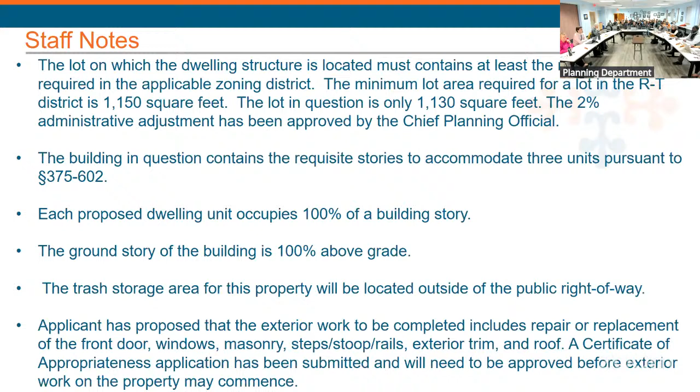All right, we've seen this before, so if there are no additional questions for the applicant, just one more call. Did Mr. Yancey or Mr. Cole, is there anybody here on the comment side? Seeing none, is there a motion from the board to approve 151J with conditions for conditional use permit?

Second. It has been moved and properly seconded. Are there any additional and final questions from the board? The motion is to approve conditional use permit for 151 J Street with the following conditions. Refuse and recycle will be stored outside of the public right of way and not visible from the sidewalk. A certificate of appropriateness application shall be approved prior to the issuance of any building permit involving exterior work on the property. That is the motion.

Call for the vote. All in favor, please say aye. Aye. Those opposed, motion carries. Thank you, board.

Oh, right, we have to do that one as a second action. My apologies.

All right. So next door, conditional use permit for 153 J Street. The adaptive reuse of the existing 2,516 square foot structure at the property to a 6,233 square foot multi-unit dwelling with 3 dwelling units.

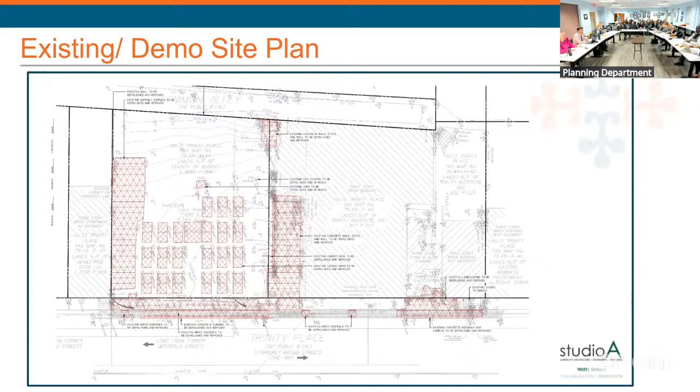And this is the basement floor plan. As you can see, the black outline is the proposed addition, and the gray walls are the existing structure.

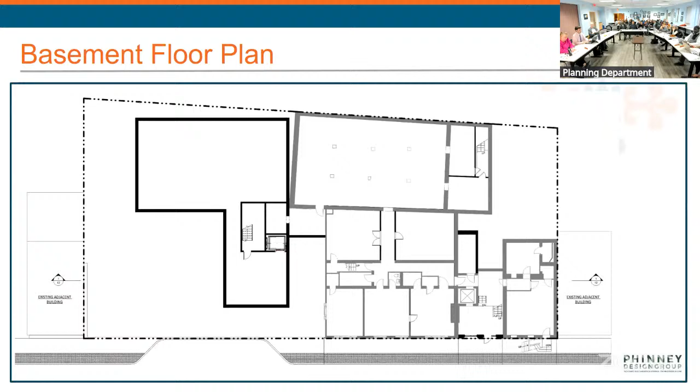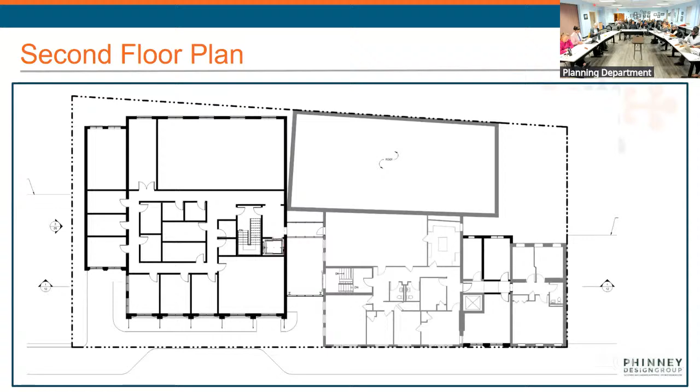And the second floor. And the third floor is only part of the townhouse and that rebuilt annex.

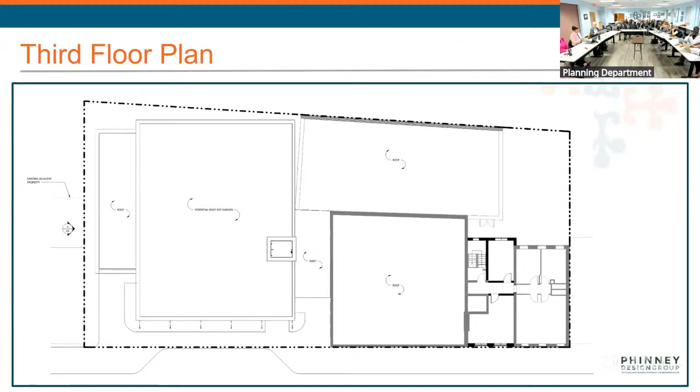Do you want to speak to some of the services? So in the Trinity Alliance, we offer a health and wellness division, a family neighborhood resource center which provides services to the community. We have a food pantry there as well, available for those in need of food insecurity, allowing them the opportunity to come in and receive food.

The hours of operation are 8:30 a.m. to 8 p.m. And we also have youth development on site, providing opportunities for after-school care for children, as well as a summer camp for the youth.

And they also have the Family Neighborhood Resource Center. Individuals can come in if they're looking for employment and have the opportunity to search for employment opportunities. We also have volunteers for tax preparation on site as well.

We have dancing with the elders on site. Those who are elderly and need a little exercise have the opportunity to come free of charge and exercise, and it's available not only for seniors but anyone who's interested in the program. So those are just a few of the programs that we have on site there.

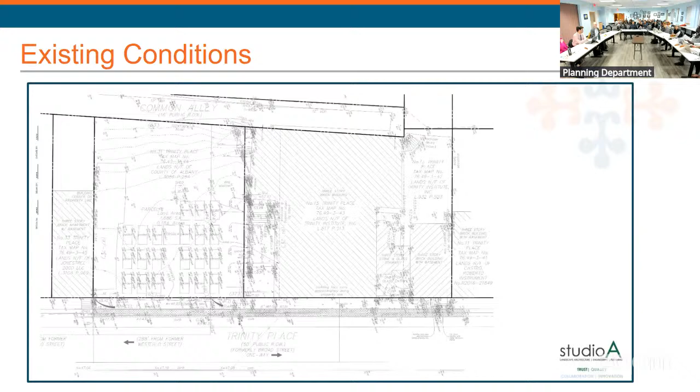So these are pretty much the same site plans and floor plans that you saw on the previous slides. It's just part of the template.

So here we have some exterior elevations, and to the left there are some materials listed for the additions. We have some natural stone water table, some dark bronze which will most likely be for the window finishes, some of the metal panels, and then we're going with a brick to blend in with the surrounding context of the neighborhood.

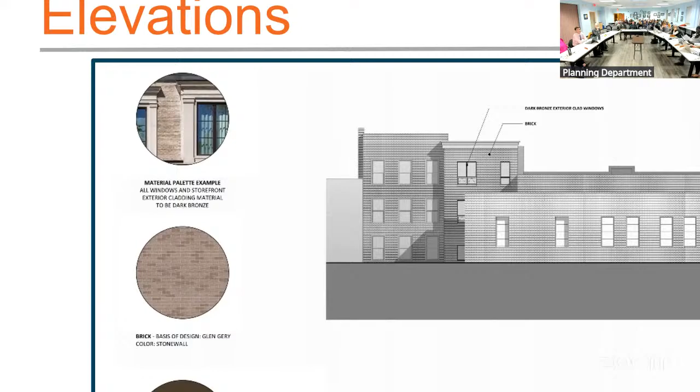This is located within a historic district. It's a contributing structure, not individually listed. So anything new or reconstructed will be of these materials. Everything else that's existing will remain, and we'll be rehabilitating and renovating it.

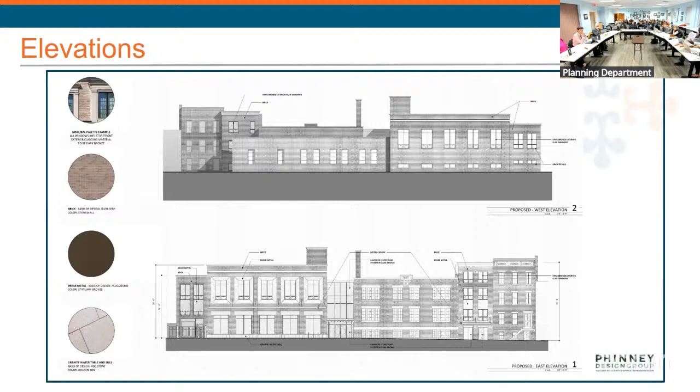And then these are just some renderings of the building on the streetscape, and that will be the overall campus for Trinity Alliance.

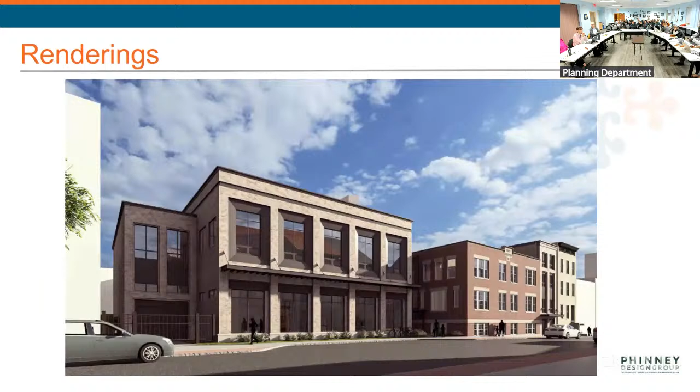So our anticipated length of construction is about a 26-month duration. This project will have to be phased. That's still in the works a little bit, but we're anticipating building the new addition first. That way, once it's complete, it provides swing space for programs to move into that building, and then we work on the rest of the existing structure. It's important that we don't completely shut down all the programs and services of Trinity Alliance during this construction.

And then as you can see, there's a full list of project funding sources up there, whether it's state or federal.

Where will you stage everything? That's a good question. We're working with Siemens to publish an RFP to get contractors on board to start those discussions, because this is a critical site. It's not easy, so that's going to be a very important plan that we put in place for staging and phasing of the construction altogether.

Do you have an additional parking lot that you guys utilize that we're tentatively planning for that staging? Can you go back, do we have a site of that? I don't know if we have the plan yet, it's just been in discussions. So that's on the corner of Trinity and Westerlo, potentially? Trinity West. Is the empty lot that they're considering for contractor parking too, or just for staging? I think mostly staging. Seems really tight.

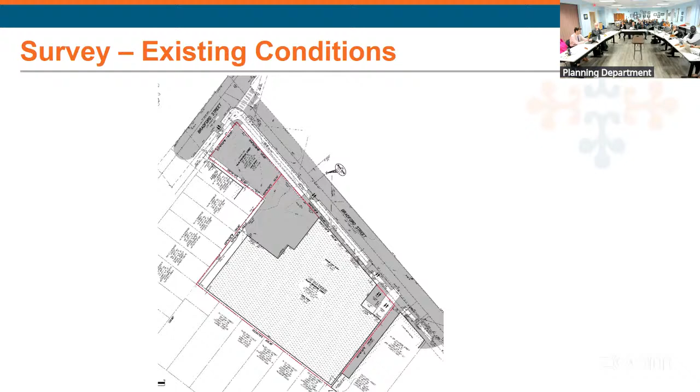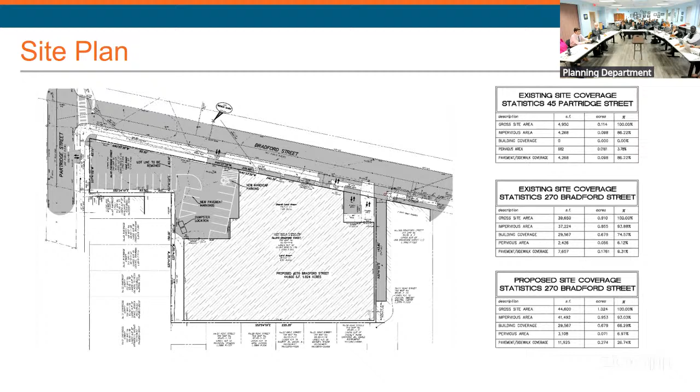Any questions from the board? No, pretty straightforward. No comments? Staff, any? Alright.

So the SEQR action is classified as unlisted, no coordinated review is required. The application was referred to the county planning board. We did receive a recommendation. They recommended the review of the New York State Office of Parks, Recreation and Historic Preservation for the potential impacts on archaeological and historic resources should be required.

The application is in front of us because the personal or business service classification of the use that's coming in is only conditionally permitted under the Neighborhood General Regulating Plan for the mixed use MUFM zoning district. The application indicates the proposed scope of work is solely interior with the exception of the parking lot improvements. The application states there's 4 tons of refuse to be generated per month. While the application states the material will be recycled to the maximum extent available, no additional details have been provided, so we're looking for a little more information about that.

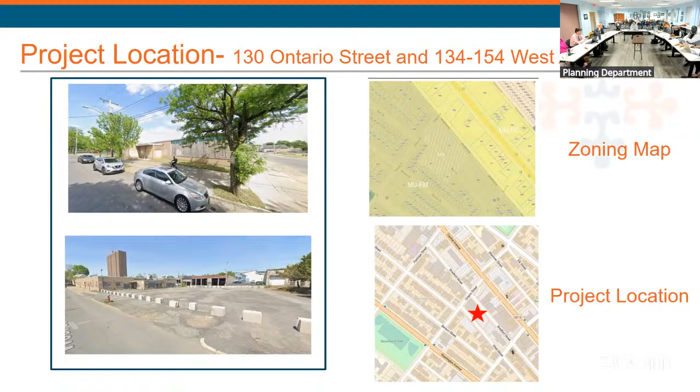If you want to move on to the next slide - so for the initial use permits, the area in green that you're looking at, that's the community hub. That's where it'll be facing Ontario Street.

Community hub space is used for residents on site, and used by the Albany Land Bank for different community activities they feel are warranted within that space. The daycare portion is shown in red, or kind of pinkish color, at the one end of the project site. That's all on the first floor.

Then we have residential units there basically on the first floor and going to the second, third, and fourth floor. Those will total 76 units. I forget the breakdown of the number of ones, twos, and three bedrooms, but they all are under the New York State Housing Program.

So all will basically be, I don't want to say rent controlled, but based on your average median income. From talking to the developer, approximately 20% will be done at 80% AMI, and the remaining 80% will be done at 60% AMI. So that's what the proposed project is.

There's not a percentage of the units that are outside of AMI. All the units on this project are similar to this developer's other project at 526 Central Ave, where all 76 units are based on AMI.

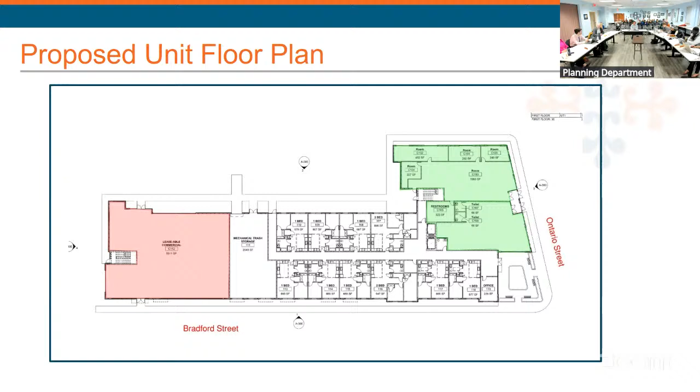Looking at the site plan, you can see the building orientation where we're trying to really front Bradford and Ontario Street with the presence of this building. And we have the parking in the rear, which is really 52 parking spaces on site.

There's a cul-de-sac that we've placed on the site, designed greater than New York State Fire Code requires. That allows access for people to come down the site, fire trucks, ambulances, emergency vehicles, or whatever, to come in and then go back out to Quail Street.

That also allows the two businesses, if you're looking at that cul-de-sac to the bottom right, those are two auto body shops, repair shops, so they'll have traffic coming in and out. We want that traffic circulation, plow trucks, garbage trucks, to keep going in and out.

You can still access your way through the site for fire safety purposes, as shown for the parking lot from Ontario Street to the west, or to the cul-de-sac through the parking lot. But by the configuration of it, it just basically deters traffic from bisecting the site.

Obviously you can see the Bradford apartment complex much easier to the right now, and their parking lot. We've now designed the parking lot so that we're pulling it away from the houses on the bottom of the page. On Ontario Street, the existing parking lot right now butts right up to their homes with no screening or protection.

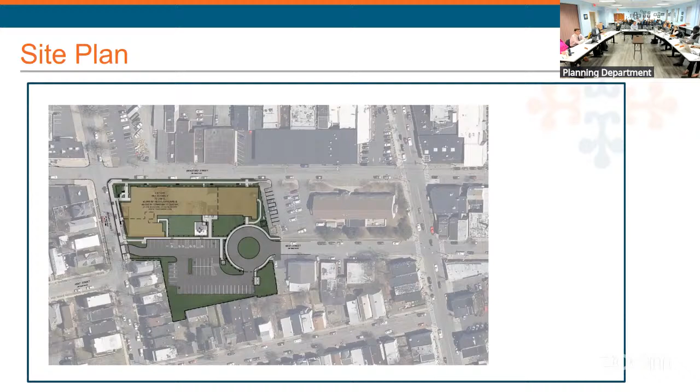For the conditional use permits, here's some of the general hours of operation. Daycare will run from 7 to 6, community hub from 8 to 10. You're looking at 8 to 10 employees, 5 to 6 employees at the community hub space, but I envision those being back and forth.

There are some other similar uses nearby, all within a half mile basically of this site, existing daycare facilities ranging in size from being at home to really being in a retail space.

Really the biggest aspect of the conditional use permit for a daycare is going to be the kids outside during daytime hours. So when we go back to the site plan, I'll show you where we have the outside amenities for the kids, keeping them away from the single family homes.

And we don't expect any large deliveries. On the demolition side, pretty straightforward: existing one-story building built in 1962 is going to be taken down.

A lot of the bricks, and certainly any recyclable metals within the building, will be pulled out and taken care of. The asphalt on the parking lots and concrete will basically be ground up and recycled for sub-base material within our project. Some of the stuff will certainly have to be shipped off-site—not everything, based on the history of this building, can stay on site.

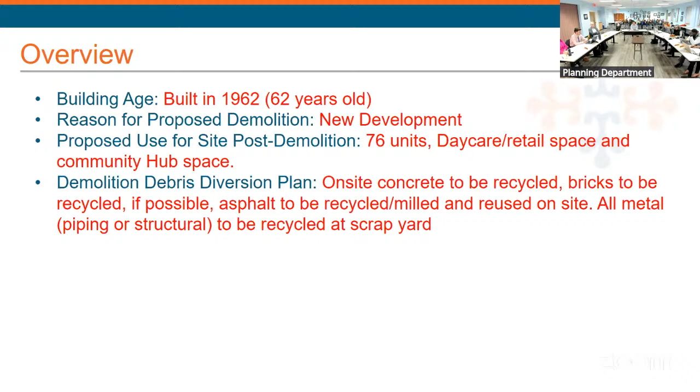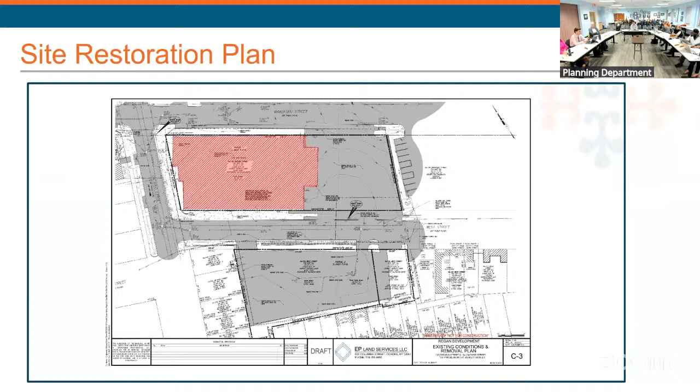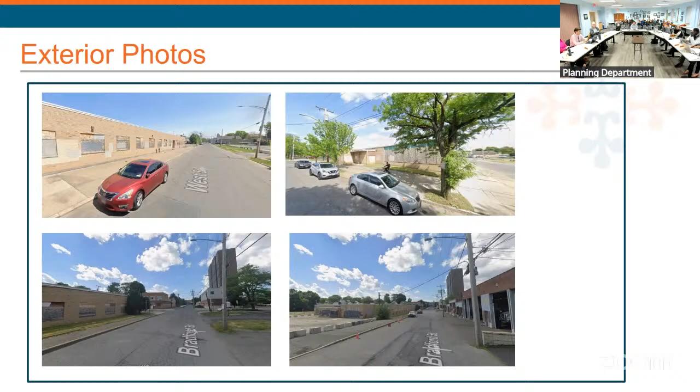Here's some existing photos of what the building looks like. Like I said, there's boards on the window. Nothing really fancy, nothing exciting. Under site plan review, again, we just have the center building in the mass with lots of asphalt around there.

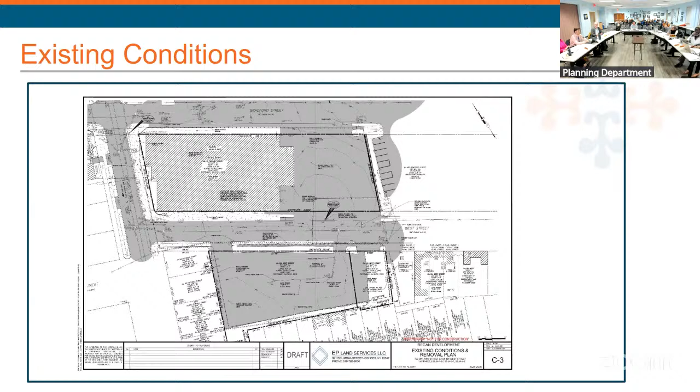And then there's additional space, I'll say on the south side, that can also be used as recreational space. We're certainly above the code requirement for the number of units for recreational space between inside and outside, and we feel that this plan definitely has multiple aspects of things.

The dumpster placement is always a concern for most planning boards. I've pushed it as far away from the residential homes as possible and placed it closest to the commercial and mechanical shops. Odors will be reduced by placing it in that general location, far away from the single family residential homes. Typically, that's what everybody wants to know about—where's that dumpster? You want to go to the next slide?

Here's some elevations and rendering views of what the 4-story building will look like. From the corner of Ontario, you can see that we are now really masking that corner.

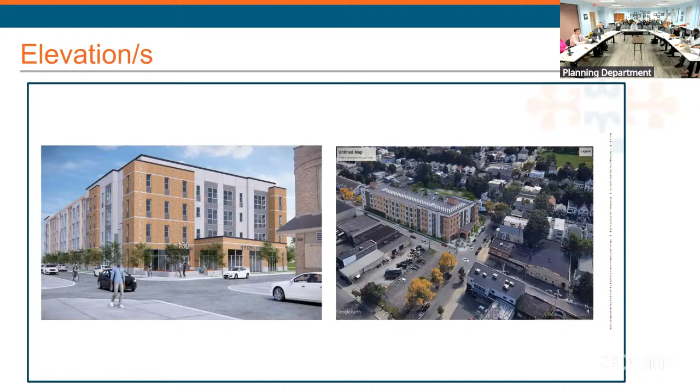The building's not placed exactly on the corner because we're stepping back the 4-story portion of the building, but we are providing an entryway in a formal location for them to go into. The building height will be 56 feet tall. There's all the sides, elevations.

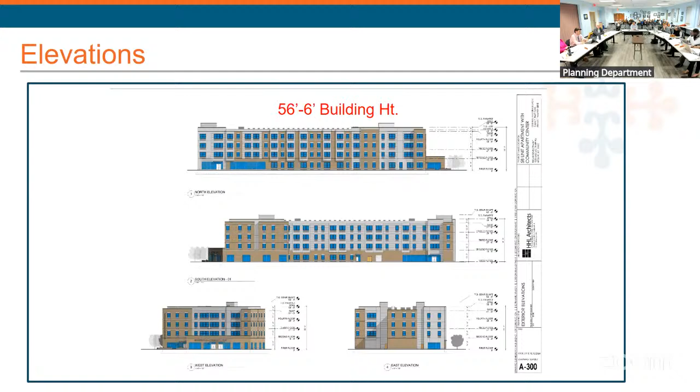Those are the first floor plan, again, the commercial spaces and the tenant spaces. And then the second, third, fourth floor plans are all the same. So I hope I did that in less than 10 minutes.

I'm probably guessing you have some questions on this, but we'll just leave that information up.

Understood. Any questions from the board at this point?

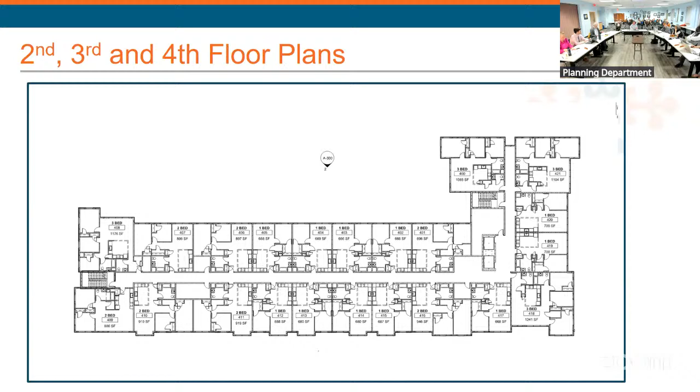Did the plans have washer dryer units in them? I have to ask the architect if there's a common room or if they're in each individual unit. I forget at 526 Central Ave whether there's a common one or in each individual room, or in each space. I can't tell you—from looking at that plan, I don't see a space for them, to be honest. So I believe it's a common area, but I can certainly ask that question for the architect.

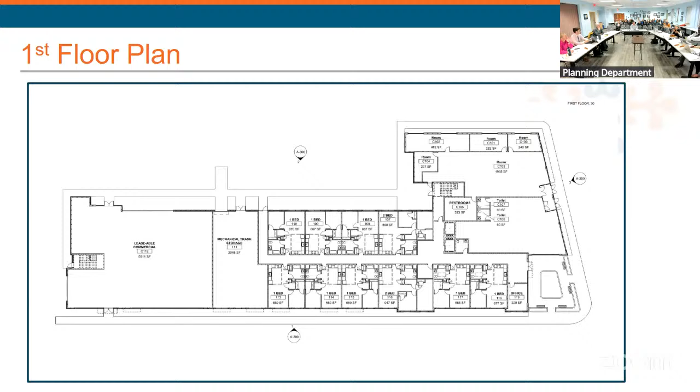So when you look at this street, there's only one entry in the commercial space for the daycare, but when you take it to the street, is there like a crosswalk there, or is there? So the daycare entry actually has 2 points. One is—can you zoom in?

It's directly across from the mechanical shop on Bradford. So there's one main entry there, but there's actually a rear entrance that faces also on the cul-de-sac. So it actually has a dual entry point—one on Bradford, one on the cul-de-sac.

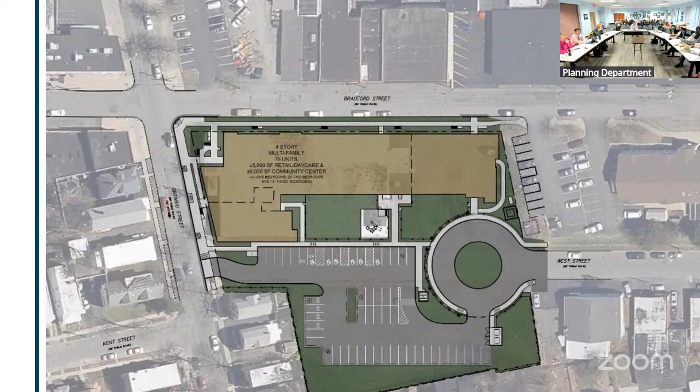Okay, I envision if I'm dropping off my kid, I'm going to just go to the cul-de-sac. But that's assuming you drive. If you're walking, obviously you have multiple points of entry. If you're coming from the south, you can walk in and enter that way. If you're coming from along Bradford Street or Ontario, you can come down and cut through because the sidewalks are all connected throughout the project.

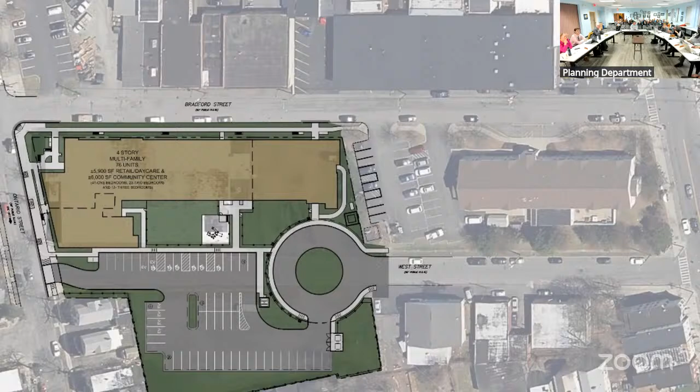You want to be able to cross, but if you cross Bradford, there's a lot of cars to navigate. Wouldn't it be great if there was a crosswalk in line with the cul-de-sac, all the way up? Just in terms of crossing, it would be great to put some street amenities, aside from making it driving centric.

That area we can look at too. For example, the streetscape - if you look at the existing conditions, the sidewalk is placed right next to the curb line. So I pulled that off so we could put in street trees and soften that building up.

But across the street, I think where you'd be walking into is the backside of a mechanical shop - that's actually one of the comments, that's where it's going to end up. To me, that's probably not the best solution, having a crosswalk lead literally to a mechanic shop where trucks and cars are coming in and out of that location.

Right, and also, many people might be driving, but it's a pretty vibrant community with kids. A lot of people are going to walk.

So it's certainly a consideration I can look at, but typically we want to avoid a mid-block crossing if possible, and based on the use next door, it's probably not the best situation. It might not be safe. It just seems that because you've strategized your entries on the ends, if someone wants to cross, sometimes they don't go all the way to the end. So we just want to provide some boundaries.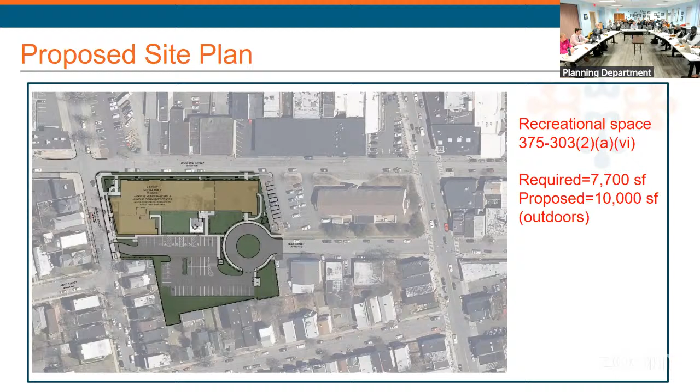That's certainly one thing that will be a bit different from our public meeting in June - talking to residents around 526 Central, they actually wanted, because the trees aren't fully mature and it'll take a while, a shade aspect. So you'll see in this project, near the cul-de-sac on the back side, there's a 10 by 10 gazebo with a picnic table underneath it so people can use it outside and get out of the sun, staying in the shade.

So they're not in the heat. That was one comment from a prior project that I incorporated into this one. Many of them spoke about the site - they loved it, X, Y, and Z, but one thing they wished they had was a little bit more coverage.

And the exit points in the building provide a canopy for code and everything as well. That's correct, yes.

But you can see from the landscaping plan, all the single-family residential homes to the south and west - the bottom of the page and to your left - we have new 6-foot-high aluminum fencing going up, and we're going to screen that fencing with a hedgerow, so the parking and everything else is completely blocked from them. Currently there's a dilapidated chain link fence there, and you can kind of see the parking lot.

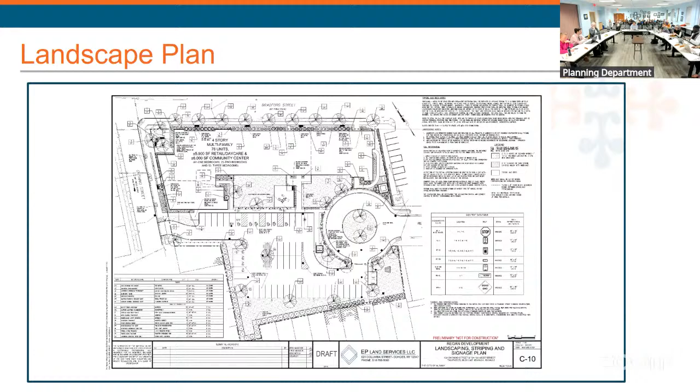Cool, no problem. All right.

Yes, I did see the written comments from the Walk-in Spring Company. That was the piece on their ability to maneuver the vehicles - they said they work on a lot of vehicles. So board members, check that out by the time we get to the next meeting.

So just remember, parking demand for this project is, I think, around 28 as calculated. We're providing 52 on site.

So even though there's street parking, if the board decides to add a no parking lane in front of those places, there's plenty of parking on site. Typical of 526 Central Ave, we had a parking ratio of 1-to-1 for the units, and certainly if you go there, the 1-to-1 requirement is not being met. It's certainly underutilized, that parking lot. So just giving that forward as a reference point.

We wanted to provide some parking on site for employees, tenants, and things like that. We felt that between that and the 23 parallel parking stalls along the existing curb lines, what you could do was plenty—it'd put you in the 80 range. But losing a couple isn't going to be that big of a detriment for the project. Absolutely.

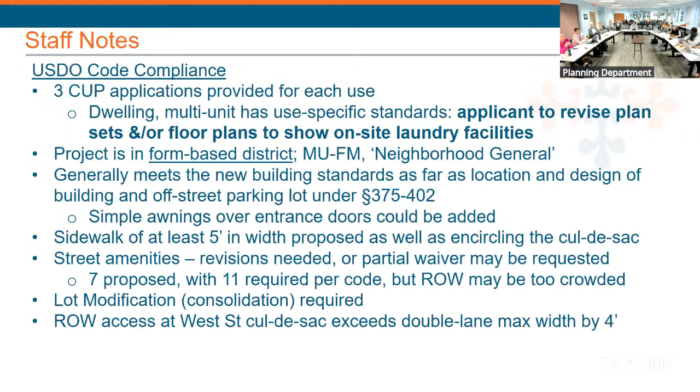So we're in a good standpoint from street trees and buffer landscape. An exterior lighting plan was provided. For any additional signage, building sign permits will need to be provided. There's certainly a possibility.

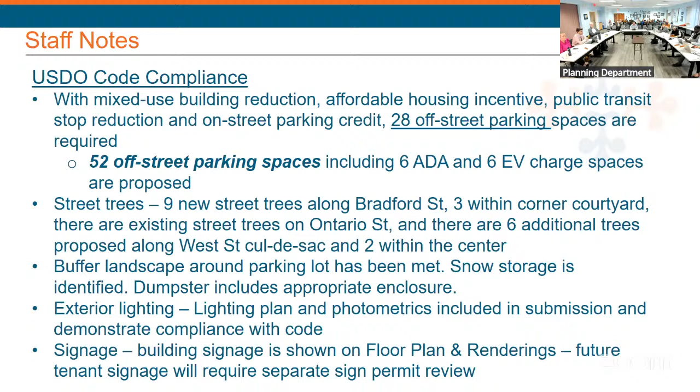That there will be changes to the current cul-de-sac design, maybe some slight tweaks here or there, depending on the departmental comments we get back from traffic engineering or DGS. It was partially designed in conversation with someone from city engineering. So hopefully not too many design tweaks, but because it is essentially dead-ending an existing city right-of-way, there will obviously need to be formal processes involved with the common council, so that is also separately ongoing.

So the recommended action is to declare the planning board to act as lead agency under SEQR and initiate coordinated review just with the New York State HCR for the funding source. All right.

Any additional questions from the board? Hearing none, is there a motion to declare the planning board to act as lead agency under SEQR for coordinated review? So moved. Is there a second? Second. It has been moved and seconded to declare the planning board to act as lead agency under SEQR for coordinated review. All in favor, please say aye. Aye. Those opposed? Motion carried. Thank you.

That concludes our public hearing agenda, so I thank you all.

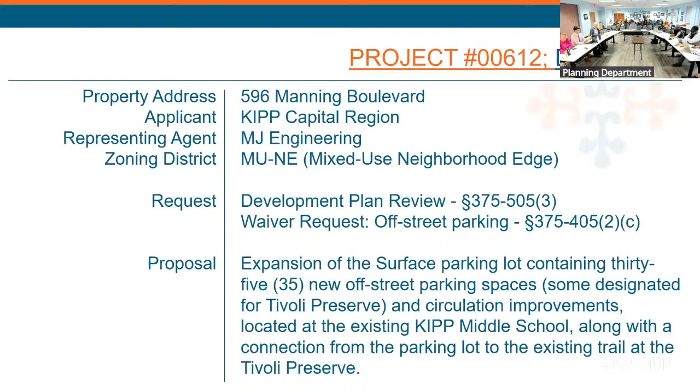Good evening. As the Chairman mentioned, it's 596 Manning Boulevard, KIPP Capital Region, currently zoned MUNE mixed-use neighborhood edge. The requirements for this project will be the development plan review and also a waiver request for off-street parking. It's the expansion of a surface parking lot to accommodate not only additional parking for KIPP School but also provide spaces for the new improvements for the Tivoli Preserve project for the city.

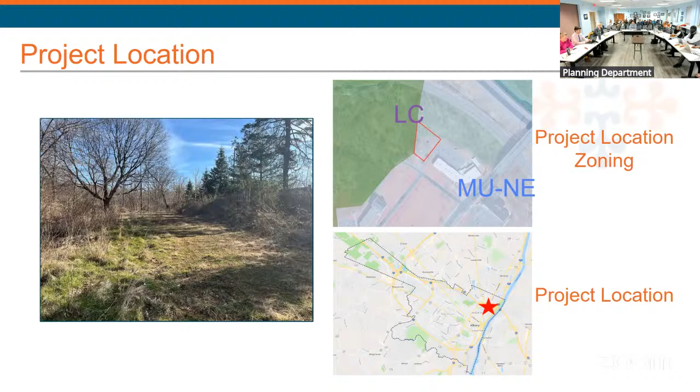Here's the project location. On the left-hand side is an image from North Manning looking into the property where there used to be a single-family residence. Looking to the right, you can see the MUNE zone and the existing middle school, an L-shaped building with the existing parking lot in the rear, and this will be to the west of the current lot.

Existing conditions, north is to the left of the page. You can see North Manning running up and down, the road going into the Livingston apartments on the right-hand side, and the driveway that currently goes to the rear of the school where buses drop off kids at the rear door. This parcel is shown in red, about 0.72 acres.

Back in 2021, the city of Albany entered into an MOU with KIPP School for this piece of property. It's owned by New York State, and KIPP is working with New York State for that transfer. As part of that transfer agreement, the additional parking for the KIPP school is also to incorporate Tivoli Preserve parking to connect to Tivoli Preserve that's there. The city is also working on an ongoing Tivoli Preserve improvement project, which we have met several times to incorporate our project into theirs.

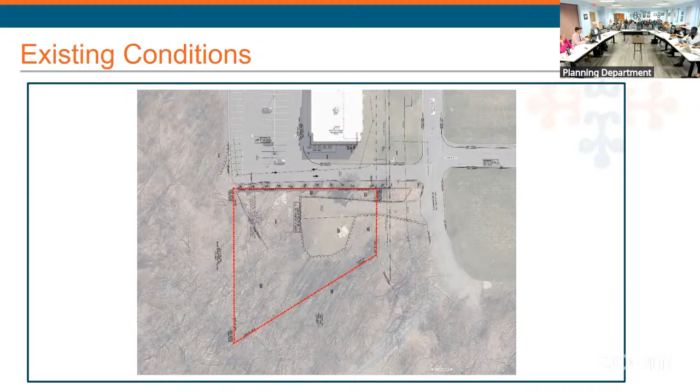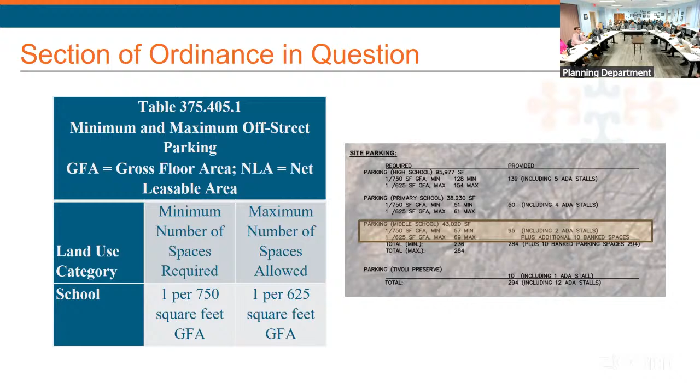We'll go through each of the 5 criteria for the waiver review. Character of the neighborhood: the request does not change the character of the neighborhood as it is located adjacent to an existing parking lot. Adding the additional driveway and parking spaces will improve the layout and help streamline traffic, reduce delays, and enhance safety for students, parents, and staff on the school premises. This will also give flexibility for when they hold larger events at the school, making it more convenient for parents to park and keep parking on KIPP property without spilling onto city streets.

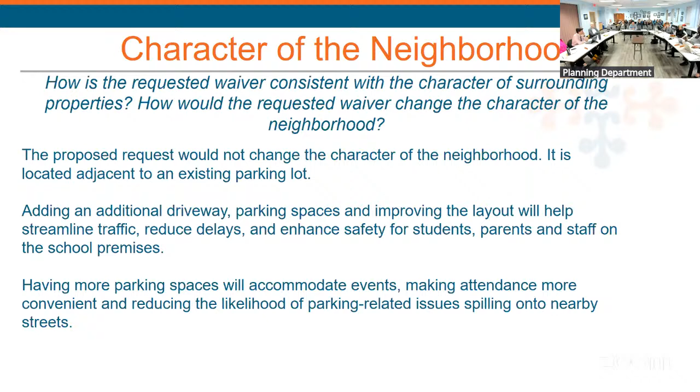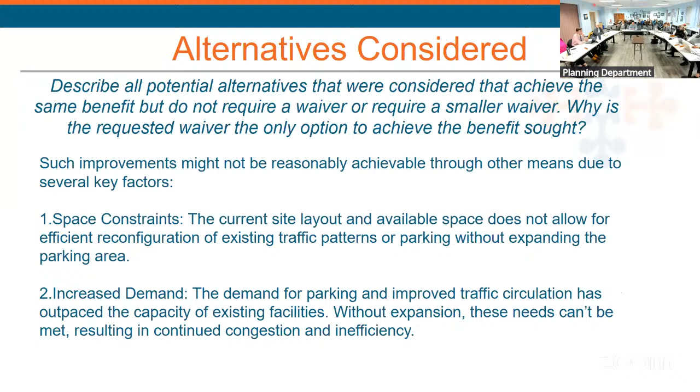Alternatives considered: space constraints. The current site layout and available space does not allow for efficient reconfiguration of existing traffic patterns for both bus and parent drop-off. The demand for parking and improved circulation has outpaced the capacity of these facilities. Without the expansion, these needs cannot be met, resulting in continued congestion and inefficiency at the middle school. Another consideration is safety concerns — optimizing the layout without expanding does not sufficiently address the safety risks posed by current traffic flow and parking limitations. Event needs, school events, and community access, like visiting Tivoli Preserve, require a more substantial parking solution than what's currently available.

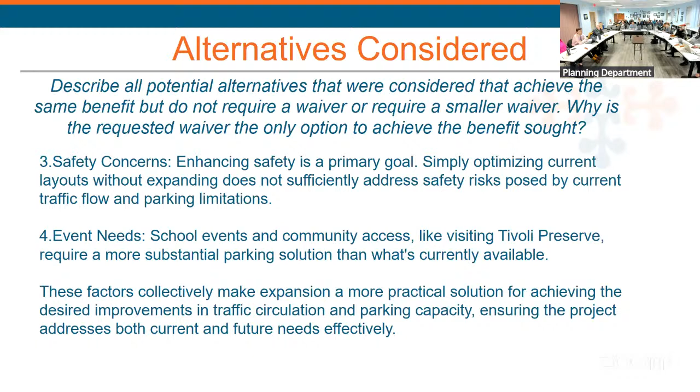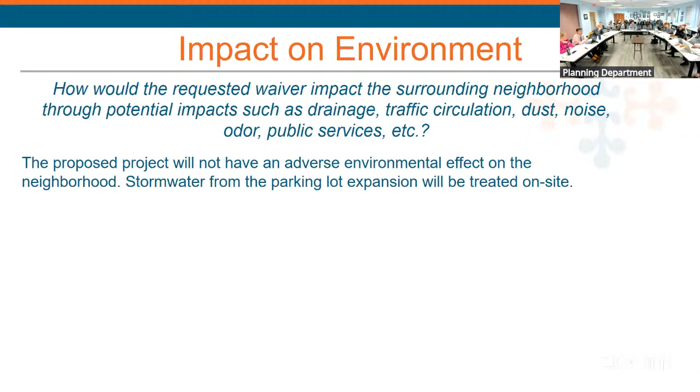Sustainability: the new expansion is set to create a better experience for KIPP with a more direct drop-off and pickup route, less street congestion, and plenty of parking for school events, while providing access to the Tivoli Preserve. Impact on the environment: the proposed parking will not have an adverse impact on the neighborhood. One thing I did mention is stormwater — we will be having post-construction stormwater management on site to handle the stormwater due to the parking lot expansion.

Self-created: improving the school traffic circulation, expanding the parking lot.

How many more slides do you have? This is the last one, I believe.

Just to quickly summarize, KIPP often, if you've been out there, has congestion issues along North Manning. So this is going to help with getting traffic off of North Manning and better circulation in and out of the facility. Same thing with event parking, also to keep that off of city streets.

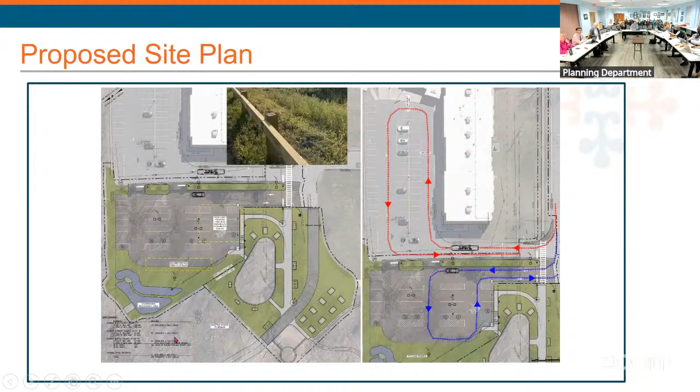So as Walt mentioned, the property previously had a single-story residential building on it, but is now predominantly overgrown with vegetation. The property is still currently owned by the state of New York, with a condition of sale from New York to KIPP, which you can read in the staff memo or which is typed up there. I won't bore you through that.

There's specific language for the use of the property included in the sale. And then there's a separate MOU between KIPP and the city of Albany, which was referenced by Walt, which is part of that engagement between the city and KIPP for those improvements to the Tivoli Preserve and part of that banked parking or specific parking for the Tivoli Preserve.

The project was referred for departmental comment a couple weeks ago and will be referred for Albany County Planning Board for the February meeting. Again, it's owned by the state of New York, so it's required by 239-m referral. The project is classified as an unlisted action based on the project scope, but it's not required to have coordinated review.

As far as code compliance, it requires a lot consolidation, as the surface parking lot is not a permitted use as a primary use in the MU-NE, but is permitted as an accessory use to the existing primary KIPP middle school. So we're expecting a lot modification to be submitted to combine 321 Northern with the existing 596 Manning.

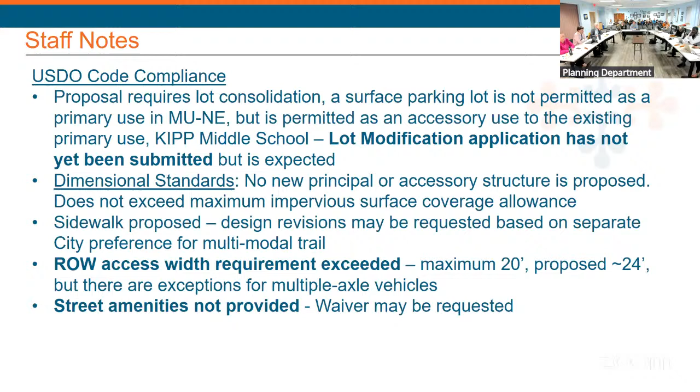Street amenities are currently not provided. That includes the free benches or bike racks, those kinds of things. So either the site plan could be amended or additional waiver could be requested. As Walt went through, off-street parking exceeds the maximum permitted, so a waiver was submitted for that, and would be part of the ultimate SPR approval.

As part of the staff memo, we did request consideration for potentially use of pervious or semi-pervious surface where possible, due to the location adjacent to the Tivoli Preserve and Patroon Creek, and reference that specific code section in the USDO. Off-street parking spaces don't meet the dimensional standards by like 1.5 feet or 2 feet.

That's again a very minor adjustment, which can be requested as a minor waiver, not nearly as significant. I feel like waiver is one term, but there's kind of almost different levels. It's more of almost an administrative adjustment. And then we're requesting a landscape sheet just to see some additional details of the in-lot plantings that are proposed. So currently there's no action proposed.

It would just be to table or defer.

Can I just ask one more question about the buses? My kids go to public school in the city of Albany and they use Tripper CDTA buses. Is it the yellow school buses that come in or is it CDTA? It's the yellow buses, but they come in from districts all over. Yeah, so that's why it's not a city system. Got it.

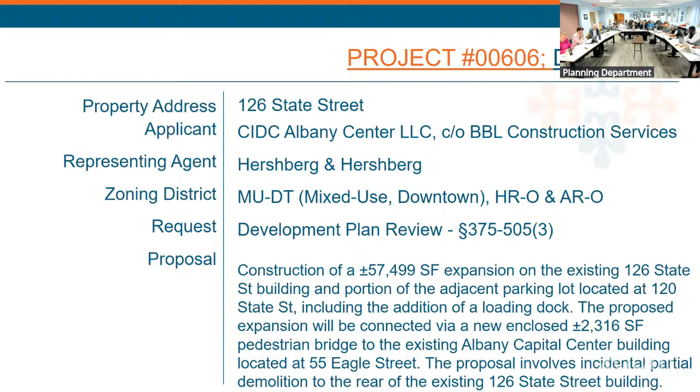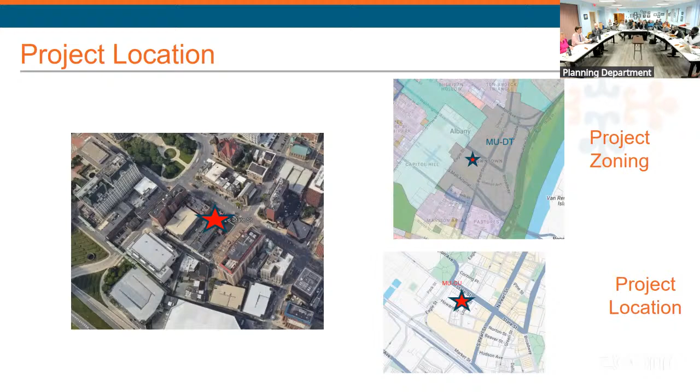The site location is fairly apparent to everybody. It's right at the corner of Lodge and Howard and goes up Lodge Street, and includes the rear of 126 State Street. We're all in the MU downtown zone.

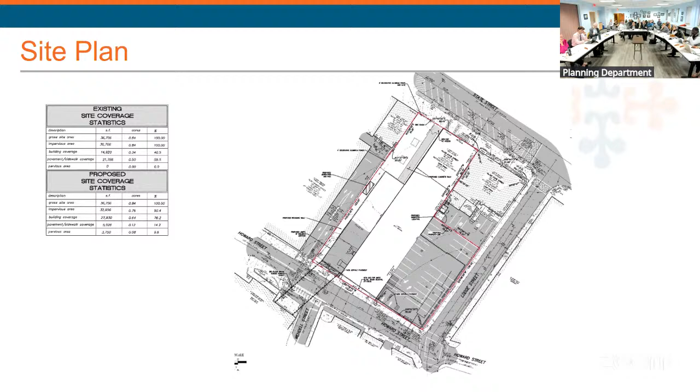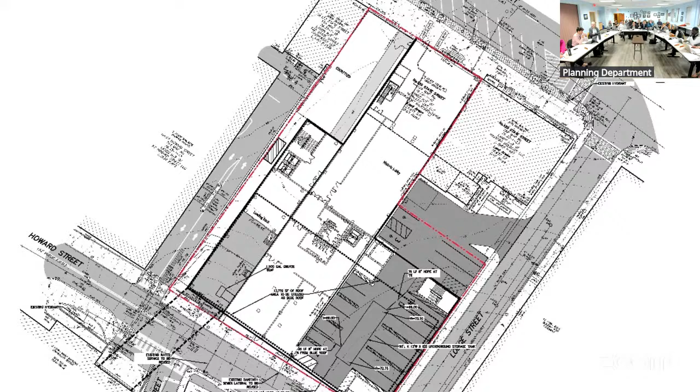And we have a utility plan. It's fairly complicated because there are a whole bunch of sewer and water connections to make, and we're doing a significant amount of stormwater management on the site. All of the new roof areas we're building are blue roofs, meaning stormwater is held on top of them after every storm, with an average depth of 5 inches — enough to hold most major storms. In addition, we have a relatively large storage chamber in the middle of the driveway going out towards Lodge Street, which will provide additional storage for stormwater. So the impact on the combined sewer system will be very positive — we're taking a lot of drainage away from it. We're adding some additional sewage, but the quantity is insignificant compared to the amount of water that comes down during a rainstorm.

Next is the courtyard landscape plan. It's still under development — this is our latest version. It might change a little bit, but that's pretty much where it sits now. We think it's a nice landscape plan; Mary Moore Wallinger did it, and she did a very nice job.

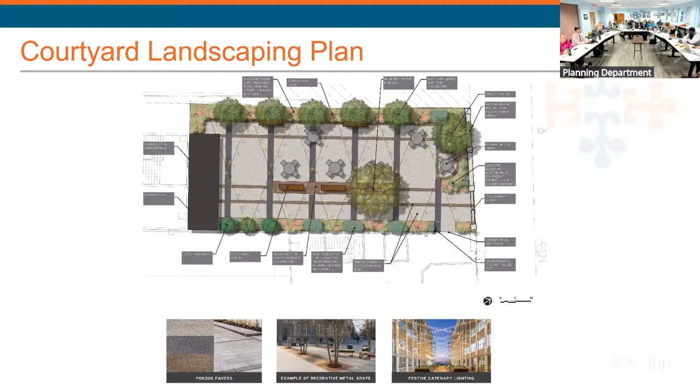Next, we have some building elevations. Looking in from Howard Street on the right, that's the Howard Street elevation you see. The Lodge Street elevation is really the end of the building, that's what you see looking in from Lodge Street at the new building.

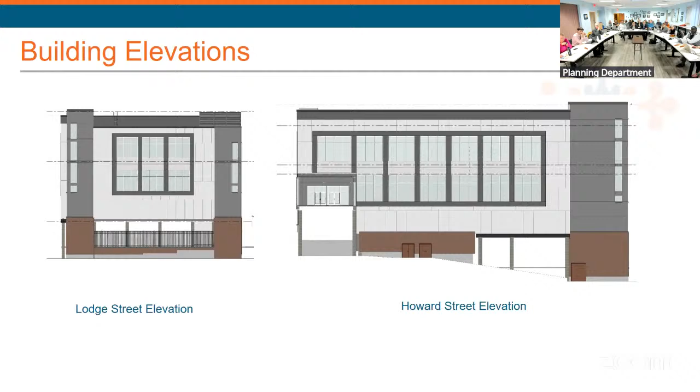Next is a building section. This shows how the building fits together. We have a multiple story addition going on Howard Street.

That's where most of the action is, and most of our 57,000 square feet of new structure is. That allows for meeting space for a whole bunch of events, small or large, with kitchen space for food preparation. It's good relief for the overcrowding that takes place at the ACC. They have multiple events they can't run because they get requests but don't have variable spaces to put people in. This provides the variation of space and size that's really needed to make it good.

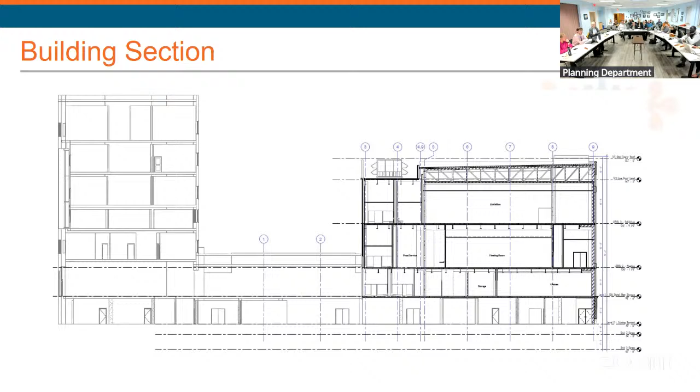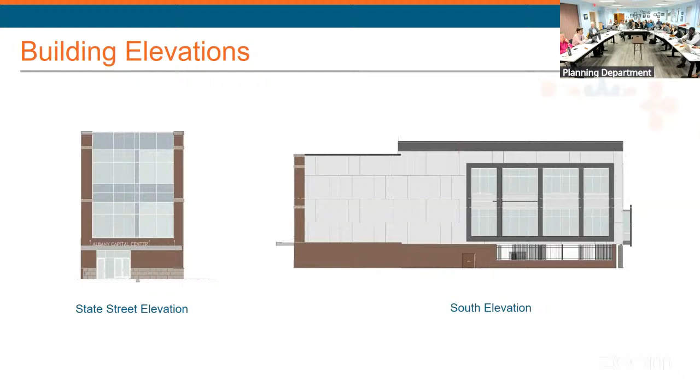Next is the building south elevation, the State Street elevation, which looks across the courtyard. The one on the left is the building that backs up to the courtyard. This is the south elevation, which looks in at the side of the building from the south.

It will require significant construction over a significant period of time. We're working with Bill Trudeau. He already requested that we get a maintenance and protection of traffic plan with phases on it, since different things will have to be changed as we go.

We intend to use the courtyard area as a staging area, since it's vacant space on a building we'll own. We'll put materials there and house employees during construction. It'll be used until we get to the end, when the courtyard will be built, and then we'll back out of there and leave it alone.

For other maintenance and traffic issues, we have to build a bridge across Howard Street and put utility connections into Howard Street and Lodge Street. So it'll be a very busy site for a significant period of time, but the projection is 18 months.

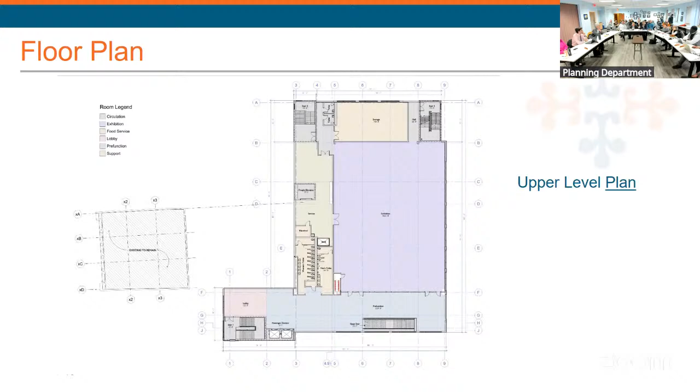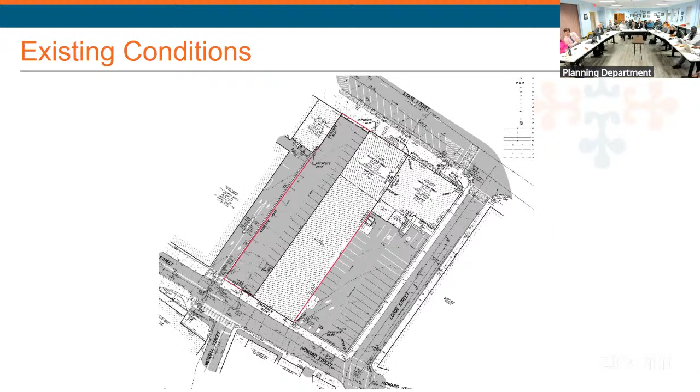Where does the footbridge fit into this upper level plan? Here it is, on the floor plan of the upper level, one of the colored plans that shows the rendering of it. It comes off the corner of the new building being built behind 120 State Street, comes up 126 State Street, crosses diagonally across Howard Street, and joins into a point on the existing center.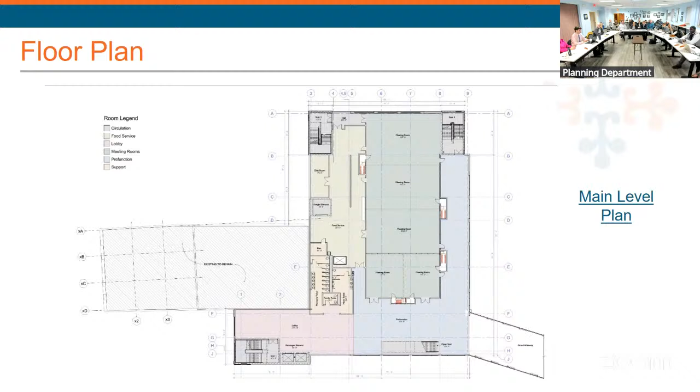If you go up one slide level, there it is, the right main level. That shows it's at a slight angle because we want to hit the right point on the existing center, so it'll cross Howard Street at a slight angle. We're working with the fire department to make sure we have adequate clearance for fire trucks underneath it. We've done this before, we built one when the Burlington garage was constructed, so we're good at building bridges.

Hopefully it'll last. My first job out of college, I worked 9 months designing bridges for a company down in Montclair, New Jersey, and I designed all the overpasses in Syracuse on I-81. So if you drive on I-81 over Syracuse... Aren't they dropping now? Yeah, they're all coming down. All the bridges I designed 63 years ago are now coming down.

What's the last use of 126? There were some commercial tenants in the building. I'm not sure exactly when they all left, but there were some offices in the front, so there's a 6-story tower. And then there were some telecommunications leases in the basement, I know.

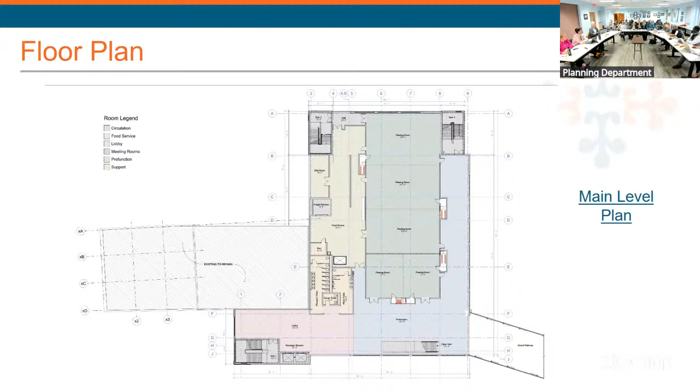So will the part that's the existing building be merged to become part of the Capitol Center's tapestry of buildings that can be used? Yes, the front of 126 State Street, the existing building. Correct. Yes, the whole facility, the addition and the existing building, will all function as an extension of the Capitol Center and give them a presence out on State Street, and provide the courtyard, some green space that they don't have now.

But the existing tower on the first floor, when you walk in, probably the most recognizable thing in recent history to most people is when Angela's Bridal was there. There's a beautiful historic lobby in there that was originally built for the municipal gas company, and then there was a bank lobby with tellers.

So that'll stay as a small function or pre-function space. And then floors 2 through 6 above, there's one floor that has a really nice boardroom, historic with a fireplace in it, and the rest will be for small meetings, maybe in that boardroom. And then the Capitol Center, the Convention Center Authority's offices, administrative offices will be in that existing tower.

So then in that tower, you connected to the smaller building in the space next to it. Yeah, the smaller new construction that's kind of recessed. Yeah, that's going to be part of 126 State Street. It'll all be connected. That'll kind of be like the main entrance, walking through the courtyard.

You can come in off the street, but it's not an accessible entrance off the street. We are proposing to put an accessible entrance just on the side of the building. You can kind of see on the side of 126 State Street, there's a little dark door. When you walk in that courtyard, that little dark door on the left-hand side is handicap access into 126 State Street, off that courtyard side.

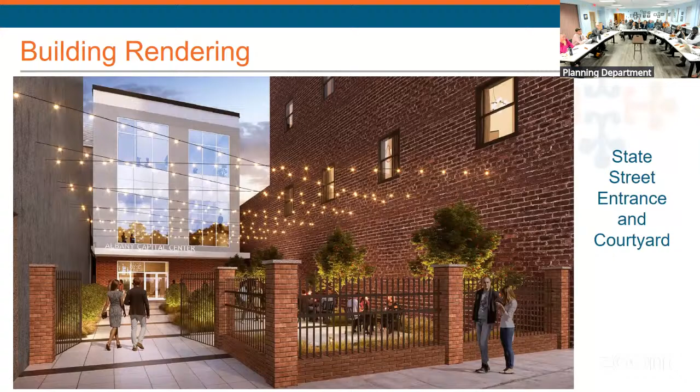The footbridge, pedestrian bridge, is from the smaller piece of this, right? It's actually from the two-story addition that's being constructed on the back. That'll go across to the existing Capitol Center. And that was actually an important piece for the Convention Center Authority, because where it connects in the existing building is the existing meeting room level.

So at the bottom of the escalator, if you've been there for big events, at the bottom of that escalator where the pre-function and meeting space is, that bridge is going to be at the same elevation. So you can be in there at a meeting. What's that? Right at the back. Yeah, exactly, exactly what you're talking about.

Here's the real question, I was getting to it. Leaving the Hilton, it's cold as hell outside. Can I walk through this building to get through? Can I walk through on State Street? Will I be able to walk in on State Street and get to all that other stuff? I can get to the Wellington. I can get to the Egg. Can I move without going back outside again?

That's a good question, an operational question. I think we can bring somebody from the Capitol Center in, maybe next meeting, to talk about it. If I can't do that, we throw this whole thing away. It's just denied, right? Just denied. I think the answer is probably going to be, at times, it depends on what time of day. Wintertime. That's okay. Touche.

Okay, good. This is a first. Informed.

Yeah, but I don't think we're voting on this one tonight. No, it's just a first. You can if you want. No, we can't, because you don't want us to vote tonight.

So we're looking at developing 2 structures, one 9,000 square feet and one 3,750 square feet. And I apologize for the resolution on these. This is my first time in a while being at this board. I would have changed what I did looking at the previous ones.

But the parcel is bordered by Centre Street on the north, Champlain Street on the east, and South Street on the south side. There's an existing warehouse/office space on the northern side of the parcel that would be subdivided off, and that is referenced as Lot 2.

There's existing parking along Centre Street and existing parking to the west side of the building, as well as a large existing parking and yard area along Champlain Street. It's proposed to create Lot 1 on the south side of the parcel with access only on Champlain Street, keeping it away from some of the residential uses along South Street.

Thank you, Anna, or whoever's doing this. I appreciate that. That's a much better resolution. Thank you. Yes, so

along South Street with access only, again, on Champlain Street. There'll be a small parking lot between the 2 buildings for 13 parking spaces, which meets the bulk standard code. The parking lot will be screened to prevent any headlight interference with, again, the properties across South Street. A small trash dumpster location will be located near the rear of the smaller building.

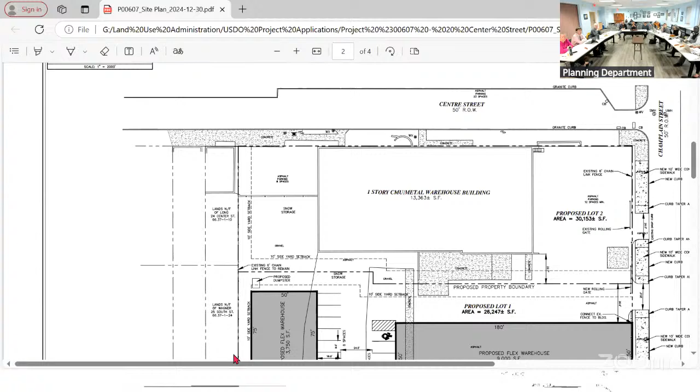That will be screened. I know in the comments, there's still some engineering comments and staff comments that we'll be going through and addressing that we recently received. But on the west side of the site there will be the trash location.

There'll be the closure of a good portion of the existing curb cut along Champlain Street to make more defined curb cuts. Right now, that whole area along Champlain Street is kind of one big curb cut. So there'll be infill of new sidewalk in those locations and the creation of a more functional entrance and exit onto the site. The entire site will be fenced as it is now with chain link fence.

Lot 2, the existing building, the existing yard, would be serviced by a rolling gate, and a rolling gate servicing the new development as well. One thing I should note, under the existing condition, almost all of this site is impervious, either concrete, crushed stone, or asphalt, basically right up to property lines.

So we won't be increasing the impervious area, and we'll be looking to maybe augment with a little bit of green space in there behind and around some of the buildings to provide some stormwater management and some infiltration into the ground, lowering that runoff curve number.

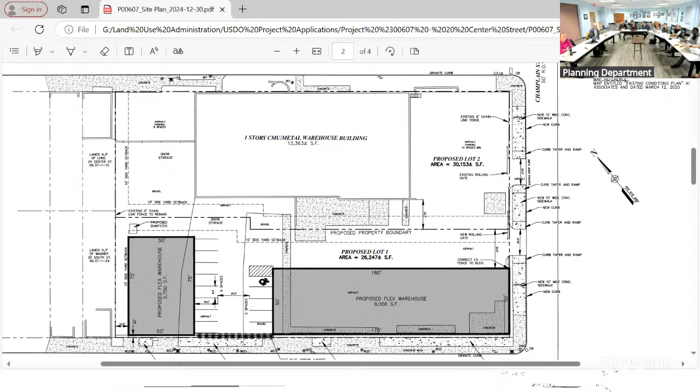If you look at the elevations for the proposed building, I don't know if those came in any better. Yeah, there we go. So this is the concept that we're proposing.

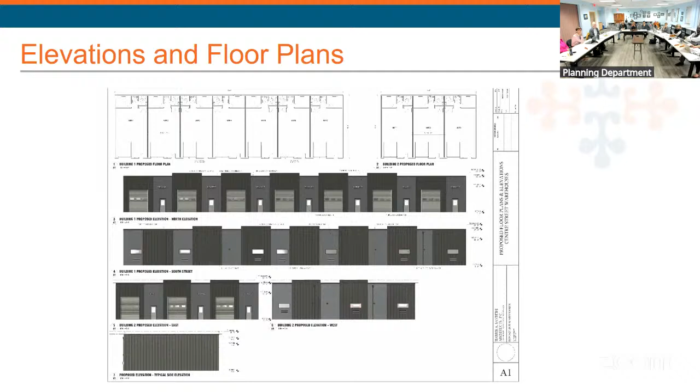The building to the left is obviously the larger 9,000 square foot building. As you see, with overhead doors for each one of the uses, varying roof lines to give you some breaking it up a little bit so that it's not just one flat roof, and a man door for access into the facility. Again, targeting small contractors who really need that overhead door space, or somebody who just wants to be able to pull their car right next to their office.

Again, small flex warehouse office space. You can see the front and rear of the proposed structures. Dan Sanders from Sanders Architecture is here as well, and he can speak to the architecture. This is what we're looking at doing.

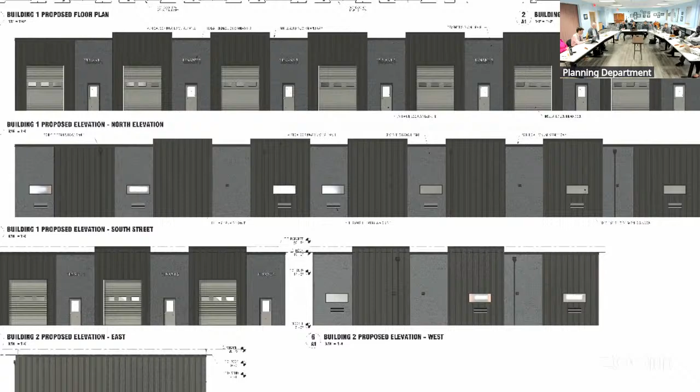The proposed development is again 10 individual flex commercial warehouse spaces, with secure garage space and small office space for future tenants. These are typically leased by contractors, plumbers, electricians, etc. We're anticipating approximately 6 months to complete both buildings.

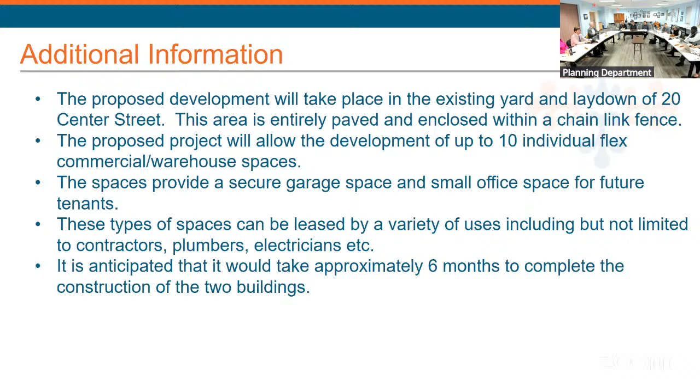Interesting. Can the space be divided or combined on the inside? Yes. Each of the spaces is about 1,500 square feet, so you can combine them to 3,000 in a module.

So what all do they share on the inside? Each of the spaces has their own office and their own bathroom, a handicapped bathroom, and mechanical space, which would have a water heater and possibly a service sink in there.

So it's like WeWork for the industrial. Yes, yeah, that's a good way to put it. Cool. Moves down. Trucks. Yeah, I got it. I've never heard of a space like this before.

Is there a pretty good demand? It's actually becoming a rising demand. There's a lot of it going up around our Castle Road area. There's been a lot of it. I have 3 projects right now which are proposing this type of use.

I think having that garage space—unfortunately, we're living in a society where contractors may not want to leave their work vehicles outside. They have a lot of valuable equipment and tools, and I know yards are getting raided for copper and things like that, where having that interior space is something they can utilize.

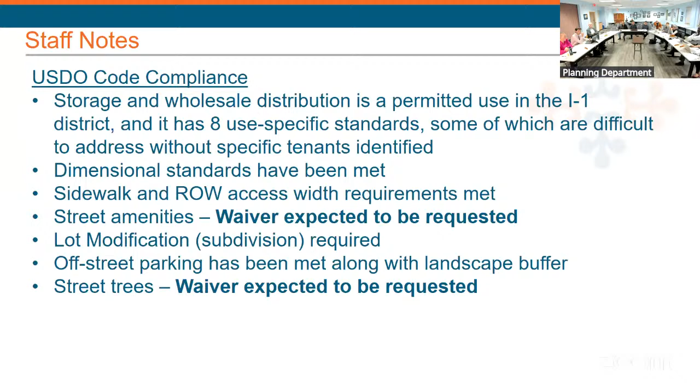As mentioned, the lot modification was submitted, and the off-street parking has also been met along with the landscape buffer along South Street because there is existing residential immediately adjacent to it along that street. Again, the street trees, we expect the waiver to be submitted for that, which would come at the same time that the DPR would ultimately be in front of the planning board. Those waivers would also be in front of the board.

There's an existing 6-foot chain link fence along the left side of the property where there are existing residential uses occupied for the USDO, so that does meet the requirement buffer. There's chain link and existing landscape there as well. Trash storage was identified and has been advised to include enclosure. Mechanical equipment seems to be either ground and/or roof mounted or interior, so it will just be identified on the provided site plan.

Building and streetscape design is obviously more oriented towards the interior off-street parking due to the proposed use and anticipated minimal pedestrian activity. So there is pretty limited facade transparency. Generally, we require 30% transparency, so a waiver may be needed depending on if any additional windows could be added to either South Street, that South Street facade.

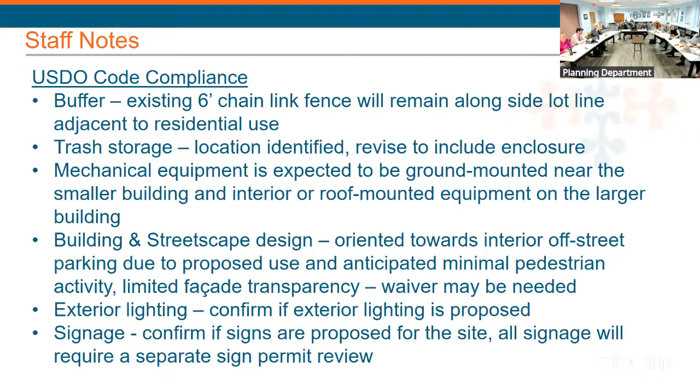Confirm if any exterior lighting is proposed for that parking area, or if any signage is proposed for the site. Signage requires a separate sign permit. So at this time, we would recommend issuing a negative declaration for unlisted action or SEQR, and then just table or defer the TDR.

Before we do that, let's have the gentleman speak. Yeah, what's your name? Mark Wagner. Let's switch places. Let's make it formal, our schedule is off, we're already at 8, almost 8:30. Want to give you a chance to speak your piece. I'm tired. My name is Mark Wagner. Thank you for listening to me. I didn't sign up. Address? Mark Wagner, 25 South Street. So resident just south of this proposed building.

A lot of the staff comments answered some of my questions actually, like exterior lighting, parking lighting. Water runoff is a bit of a concern. I was wondering if they considered porous pavement at all, and where the sewers are, if there's any new sewers. I was a little disappointed to see the waiver on the trees for that area too, because there's no trees on South Street at all, so that would be a nice addition. I know it's a little more work to maintain these things, but there is some work being proposed on Broadway, just up the block. There's a NYSERDA Climate Act change for that to bring green space in, cool it down. So that could be part of this project too.